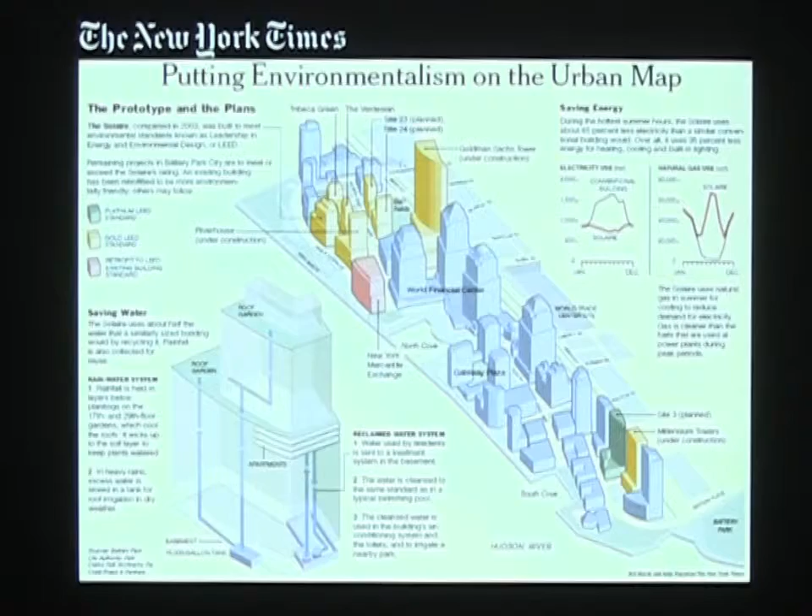And it's really quite a staggering example of educating an industry through government policy. And it included a lot of different requirements. They asked us to submit for what was called the LEED Building Rating Program. At that time, it was a very new thing. Now it has really become the predominant third-party objective measure of the environmental quality of your building. There are a lot of critiques of it, and I think some of them are valid, but it has still become the predominant one.

We had a tax credit, which is a New York State initiative, which we were trying to follow for all sorts of economic incentive benefits. And we had Battery Park City's own requirements. Now, all of these things cut across a lot of different sectors, from energy to air to materials, operations and maintenance, how you build the building, water conservation. It really included a lot of categories. But there were a lot of different issues we were trying to deal with in the 3 buildings.

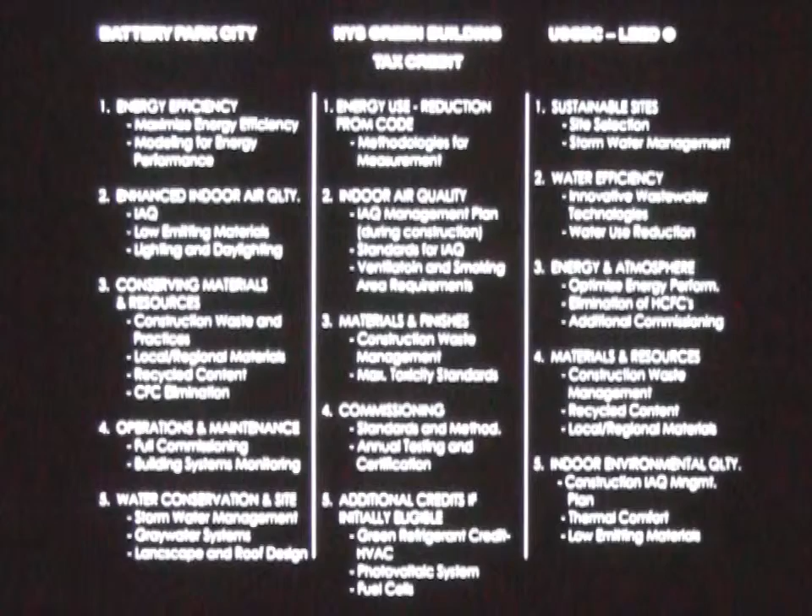That building was very successful, as I said. It led us to do a second building, which was even better. That second building was then the first LEED Platinum building in New York City, and the first residential building to be a platinum building in the country. And it's then led to this third building. So I'm really going to show you more detail about the third building, because this is the one where we kind of put it all together and we were able to do some more fun things.

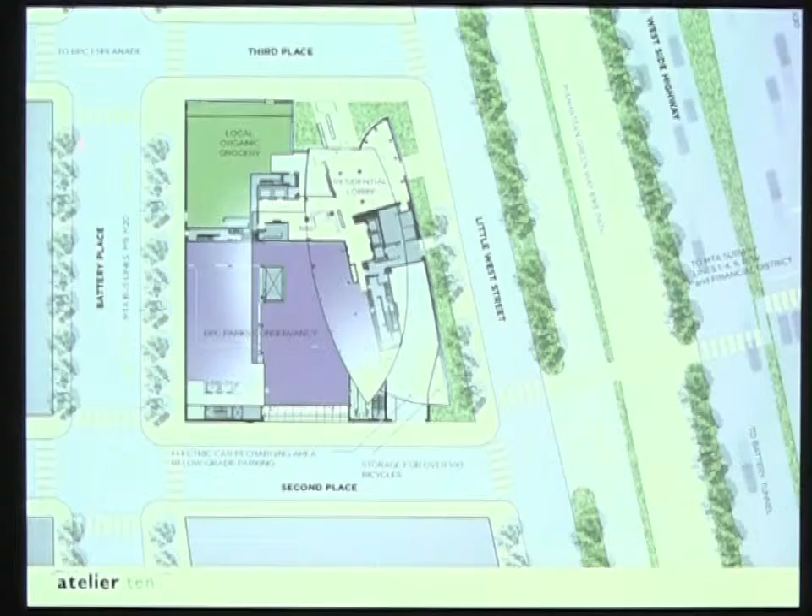So here's the building here. Very glassy in its appearance from the outside, though it's not as glassy as it appears, in that a lot of this glass actually covers the insulated wall behind it. It is on West Street in Manhattan. It's got a lobby at the corner of Little West Street and 3rd Place. For those of you who know Battery Park City, it actually houses the Battery Park City Conservancy, which maintains all of the parks in Battery Park City. So they've got big manure piles and dump trucks who come in and out of their garage. And it's got a little organic grocery as part of their one retail tenant for the ground floor.

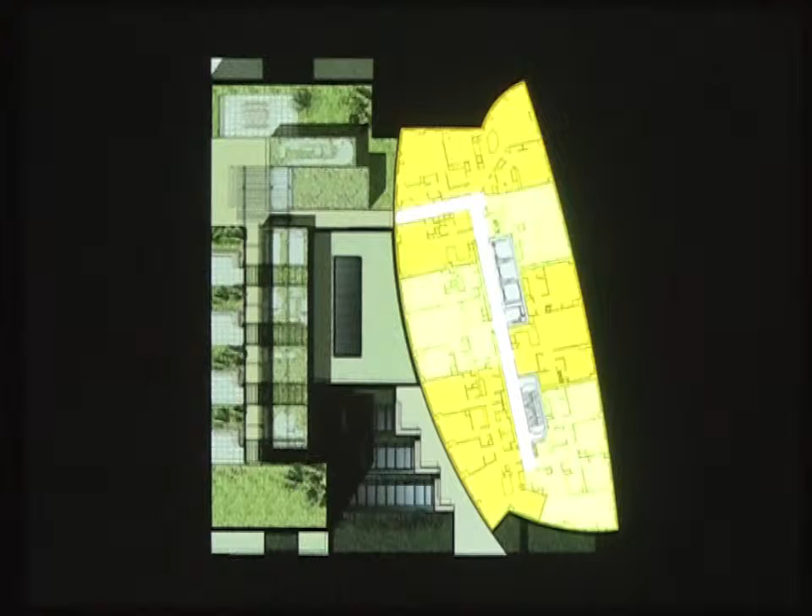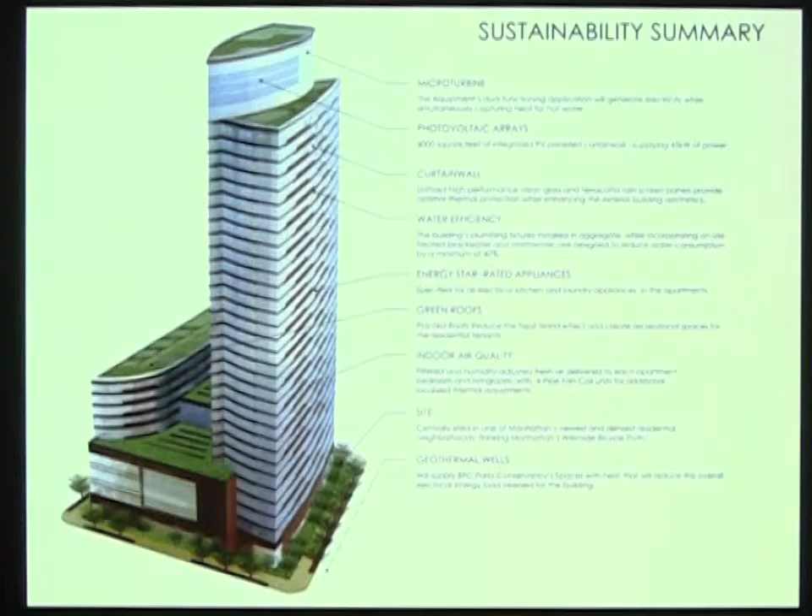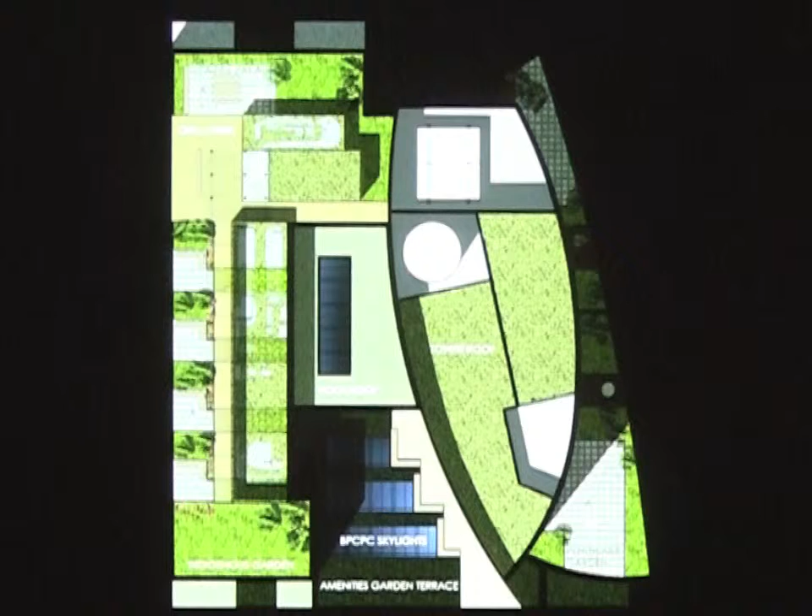And here are all of the green roofs. This is looking down on the building from the very top, showing how every level, every horizontal surface in this building is treated as an amenity and largely planted. Now, what I wanted to show you now was some of the strategies for dealing with environmental issues and resource efficiency.

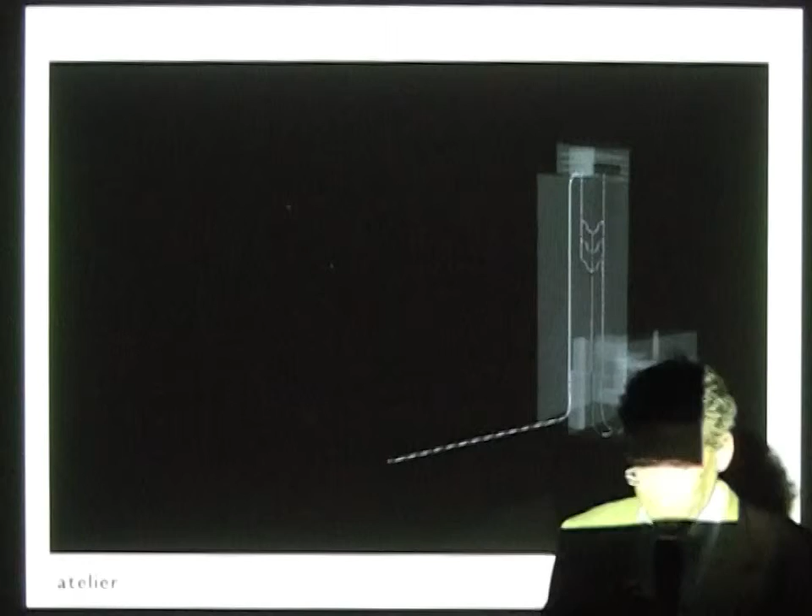You're going to have to bear with me a little bit, because I have some animations in this PowerPoint. And due to the marvels of modern technology, they're not working properly. But if you bear with me, I can actually run them manually. But you're going to have to just bear with me for a second.

So this is describing the water systems in this. We have a gray water treatment plant. All the fresh water comes into the building to a house tank, used for showers, laundry, flushing toilets, and then it goes to a water treatment plant. We treat all of the wastewater in the building. It treats over 30,000 gallons of water a day.

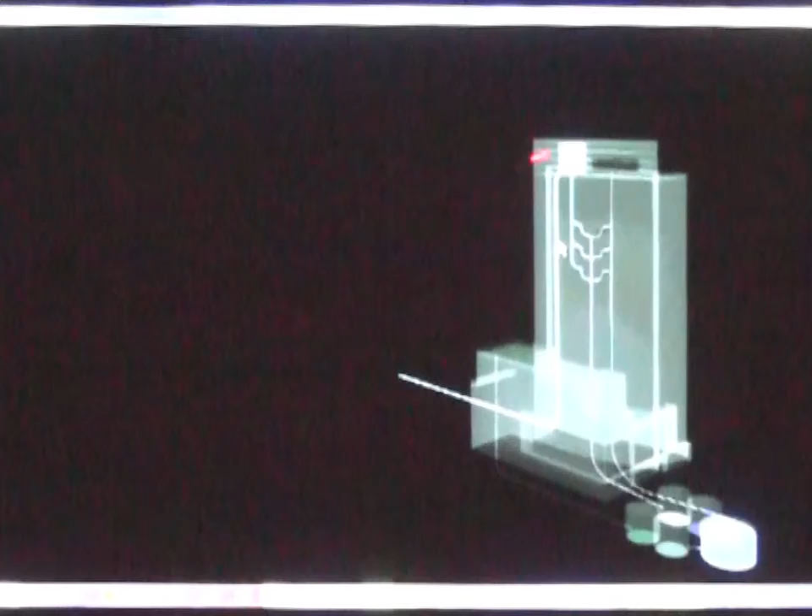That is then mixed with all the storm water, which is also collected. That mixed batch of water, after being treated, is then sent back into the building, and it goes back to the toilets, really only the toilets. It's not used in something that's going to be in direct contact with the skin. It's not used for sinks, and it's not used for showers. And the toilet use is only 5,000 gallons of water a day.

So where does all that water get used? And that's one of the most fascinating things that I learned about water usage. Let me just now put this away and go back to the slideshow.

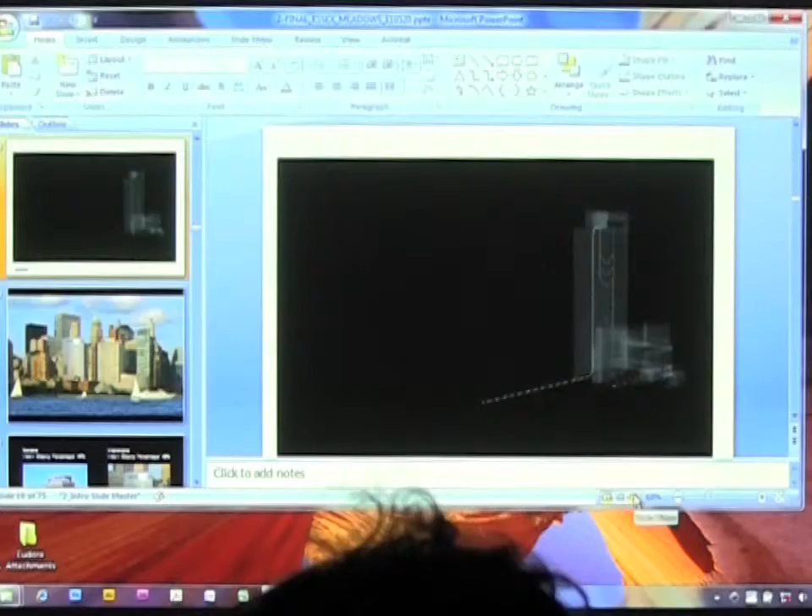So the fascinating thing about the water usage is, as I started analyzing with the engineers, well, what does this water do? Well, some is used for irrigating the planting. Well, what about the rest of it? Well, the cooling tower. The cooling tower is this thing at the top of the building which evaporates water as a way to get you a chilling system to help you create air conditioning. And it evaporates somewhere between 15 and 20,000 gallons of water a day.

And so what I learned in this conversation with engineers, which I never knew, one of those humbling moments, is the biggest use of water in New York City is for cooling towers. The single biggest use of water in most cities is for evaporation in order to run air conditioning. And if you think about the environment and water as a resource, it's a profound thought, because over 50% of the world's population lives in cities now.

I'm doing work in Sao Paulo and Mumbai, cities of 20 million. And all of these people are going towards more urban solutions. And most of them are actually in more temperate climates, or even hotter, subtropical climates than we are. And they're actually demanding, as part of an increased standard of living, more air conditioning.

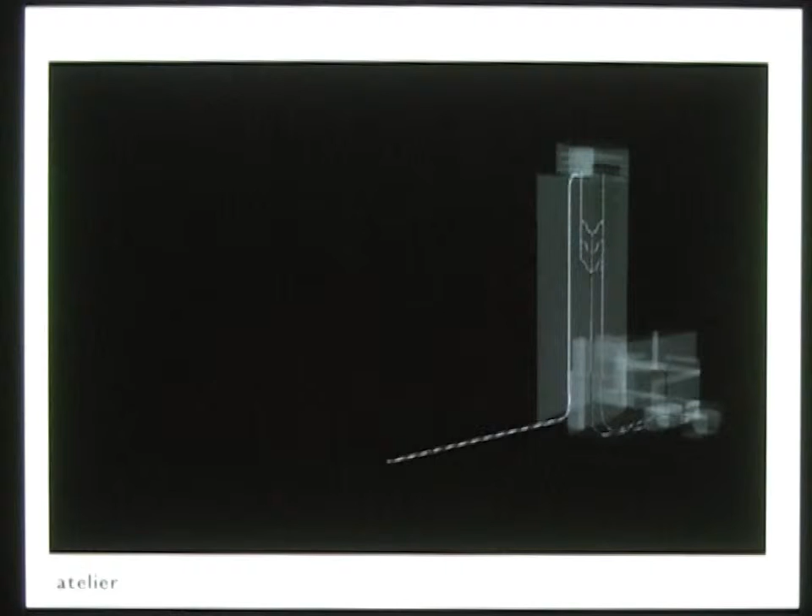And so you think, the water problem we're talking about in this world is intimately related to the issue of air conditioning and urbanization. And so this strategy of reusing water is fundamental to how we're going to deal with water as a problem in the years going forward. But it's something I never knew until we got into having all these conversations.

So here's a view of the building from the river. Now, I talked to you earlier about how glassy this building looks. One of the biggest correlations between an inefficient, high energy use building and the appearance of the building is the amount of glass on the facade. Traditional buildings were pretty effective that way, because you knew that instinctively, intuitively. The older colonial buildings had little windows because you lose a lot of heat through them.

But modern architecture, modern development, modern marketing wants really glassy buildings. And there's some wonderful features to having very glassy windows in living rooms. So we were trying to balance this objective of having some very glassy open areas of the living rooms, and this very abstract composition with a lot of glass, with the energy consequences of doing that. And this was a back and forth with our energy analysts to come at a percentage of glass that we could do.

And the interesting thing is that in the end, these two buildings, while they look wildly different, turn out to be very, very similar in terms of the amount of actual vision glass. And I say vision glass because a lot of the glass you're looking at here is actually called spandrel glass. It's a back-painted glass which is forward of an insulated wall. Instead of having brick in front of it, it's got glass. So sometimes the appearance belies the actual energy performance.

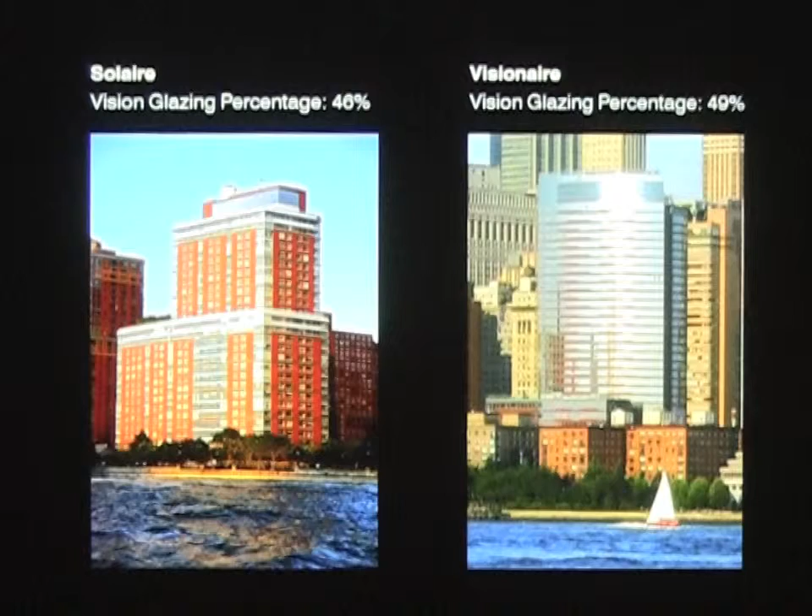But vision glass is one of those indicators of how much energy you're using. Now these are the spandrel areas. These are actually not clear glass. There's insulated wall behind them, and that's the clear glass above, which shows you how well it can be masked if you have a very highly reflective glass.

Now, these are actually as if you took a cut through the wall and you did a digital energy simulation on it. What's interesting about modern technology, one of the things that's happened in the last 10 to 15 years, is the advance in computer modeling software to allow you to really understand the performance of a lot of things that you want to try to design. So what was interesting on our first project, this is the first time anybody had looked at a traditional brick and block New York construction wall using these techniques.

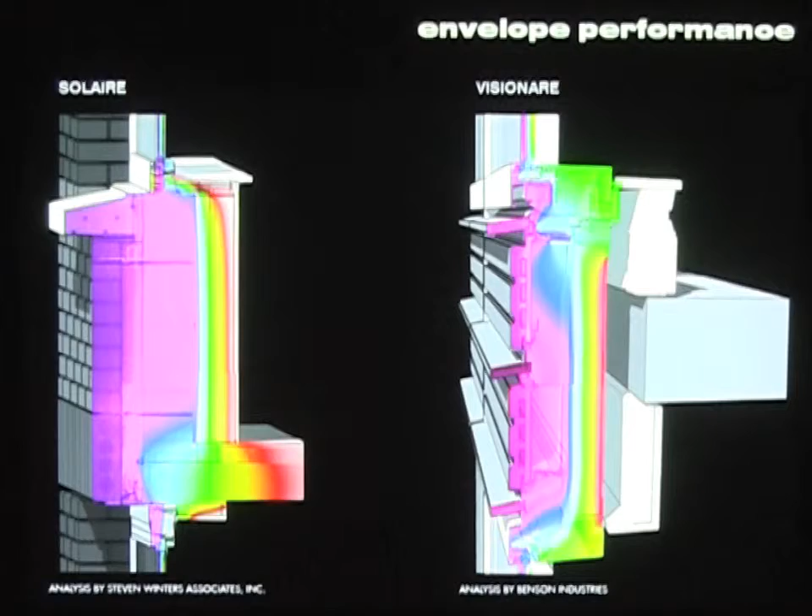And in fact, these things leak like a sieve. And our client, the owner, actually built a mock-up of it and put it in wind tunnel testing to see where it leaked like a sieve, so we could try to patch up a lot of those cracks. But we also did it for the new wall. We worked very carefully on the energy performance of that wall, looking at how we could make a lot of incremental adjustments to make the wall perform better.

We also included a large array of photovoltaics. These are photocells which make electricity. 5% of the building's electricity is generated through the photovoltaic cells at the top of the building, which are integrated into glass panels at the very top of the building. And I think they actually look really beautiful because of this kind of stippling textured effect.

Now, here's another one of those animations you're going to have to bear with me on. But in the end, when we really tried to delve down into the energy use for this building, what was driving the energy use for all of these residential buildings we were doing, we found out that what was really killing us was the ventilation. We were doing all this good stuff with fresh air.

We were bringing outside air in, filtering it, cooling it, dehumidifying it, bringing it to all the apartments, and we had great air quality in all the apartments. But there was a big energy consequence to this because they were running 24 hours a day, even though the buildings were empty a lot of the time.

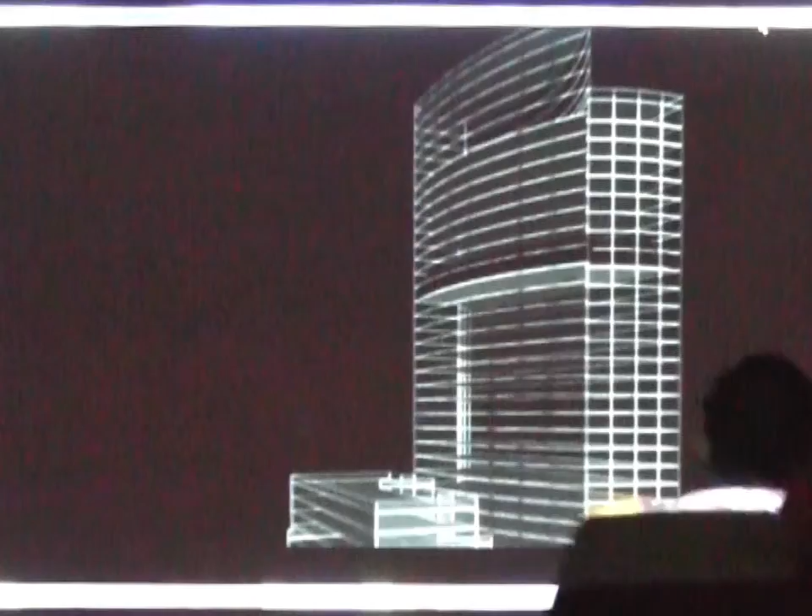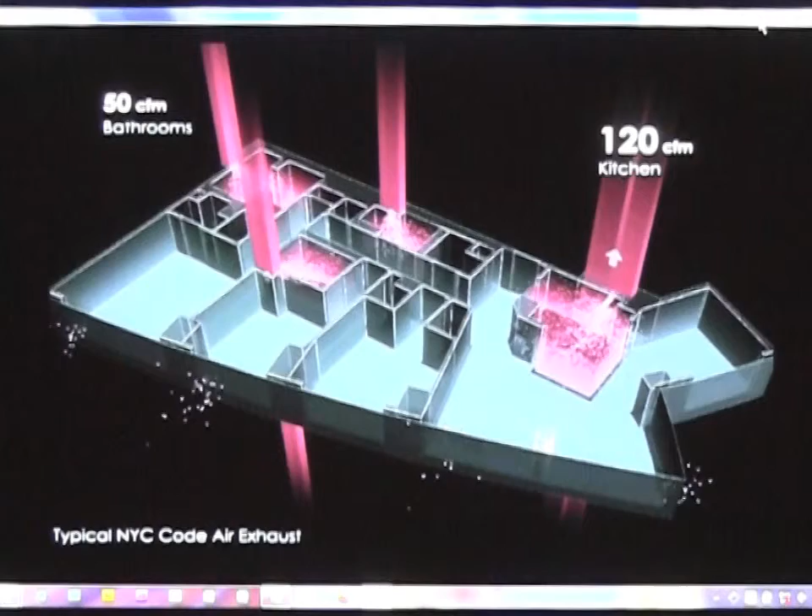So here's a look at a piece of the building. Take a look at the floor of the building, and that's a typical floor of the tower. And if I take a look at one apartment within that building, all that little red fairy dust, that's supposed to be hot air being siphoned out through exhaust. New York City code requires you to exhaust a lot of air out of your kitchens and bathrooms as sanitation measures. But typically you don't supply any air.

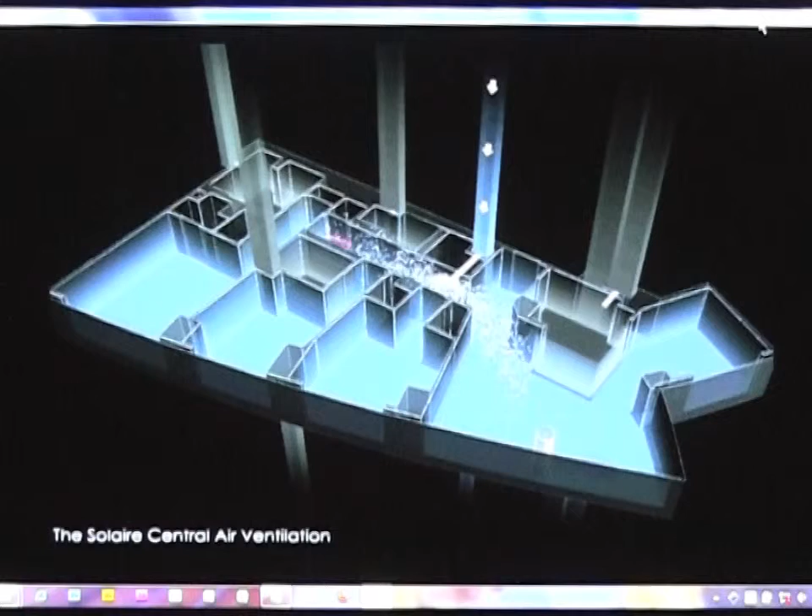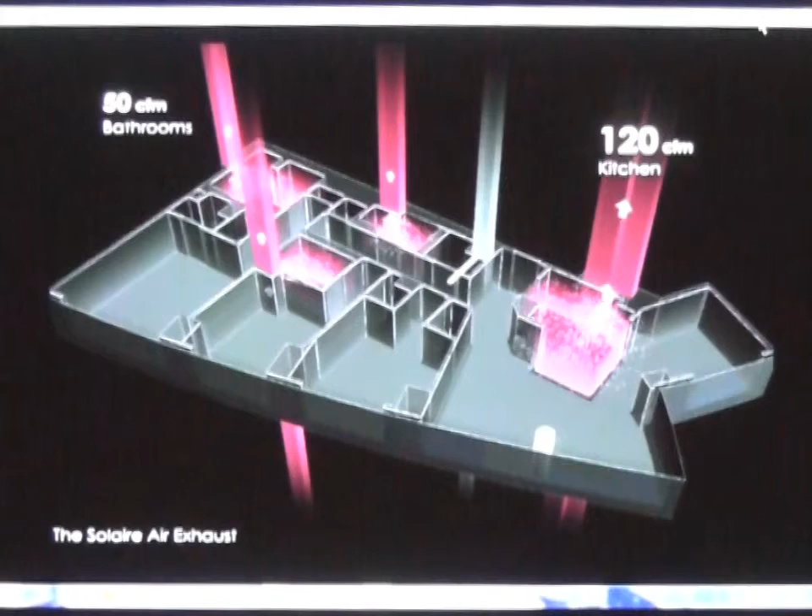Well, now in order to make the building work, we had to supply just as much air as we were exhausting out. That turns out to be an enormous amount of air. And there's a big energy consequence to doing that amount of air 24 hours a day, 7 days a week for apartments which are largely empty.

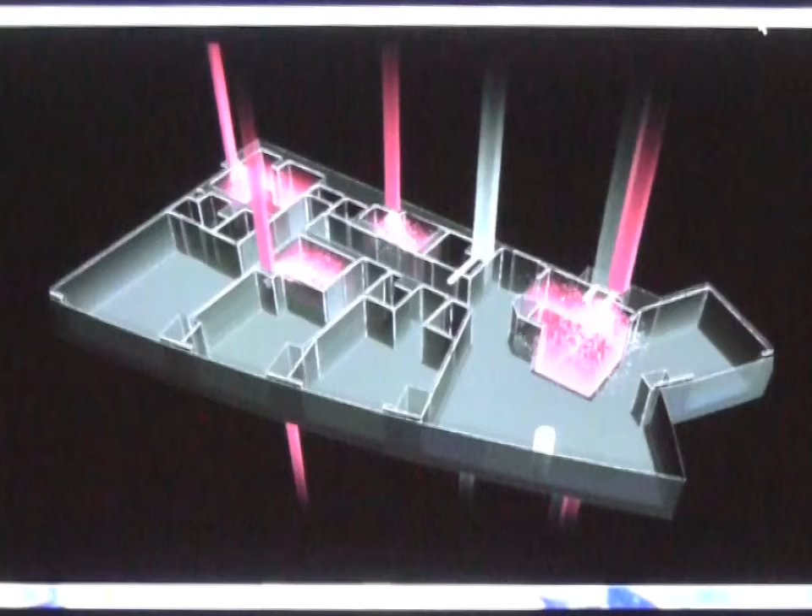So on the second building, we were able to actually work with the New York City Department of Buildings, and we got approval on a pilot basis to downsize the amount of exhaust, and working with newer standards and European and Swedish standards for fresh air supply, try to balance this from a fresh air supply standpoint, saying this is how much fresh air people really need and what is a good standard for fresh air. And let's downsize the amount of exhaust that we've got through the other ones. And this was accepted and it was still thought to be sufficient for good sanitation practice.

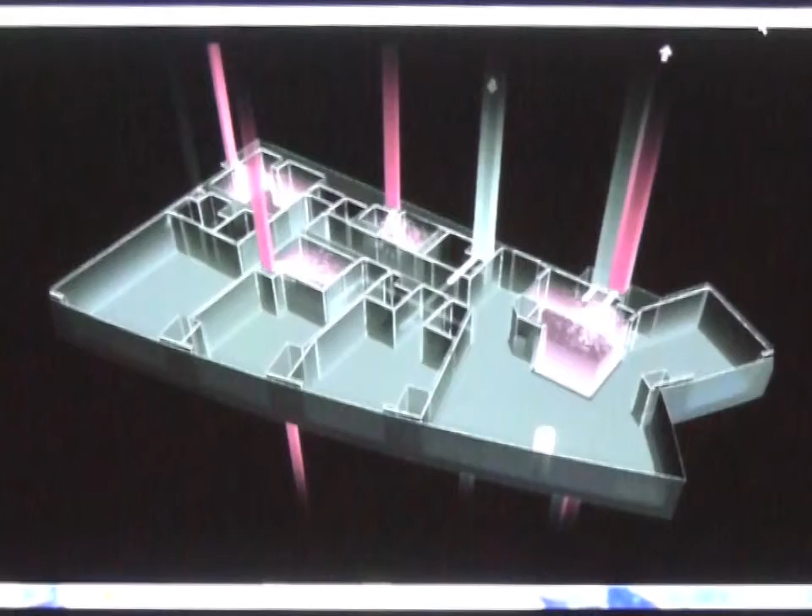Now, it was still running constantly. So what we did finally on the last building was we were able to distribute the air more carefully through the building. We get the air to flow throughout the apartment better.

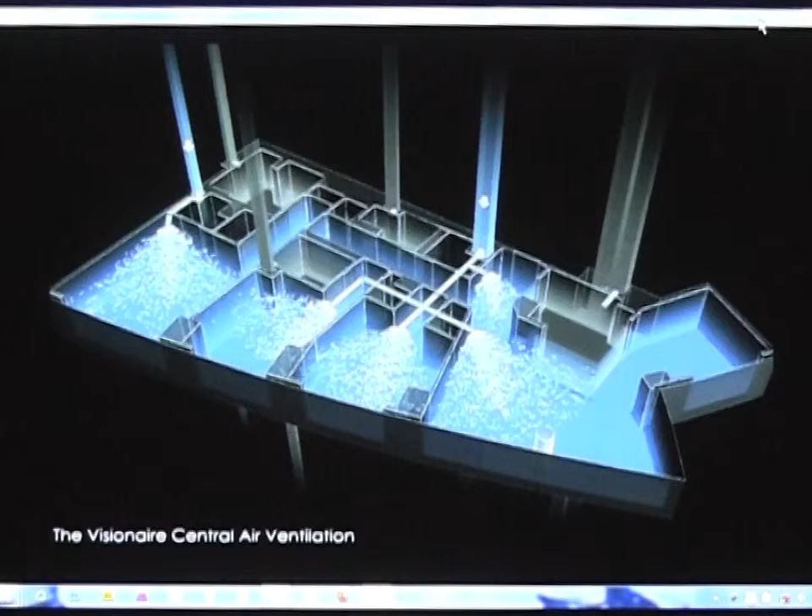And then finally what we were able to do was create a sort of demand-based air ventilation system where you only bring in a minimal amount of air for the minimal amount of exhaust on a typical basis, but you can actually increase that dramatically at the kitchen exhaust when the kitchen's being used, and then you do a higher exhaust.

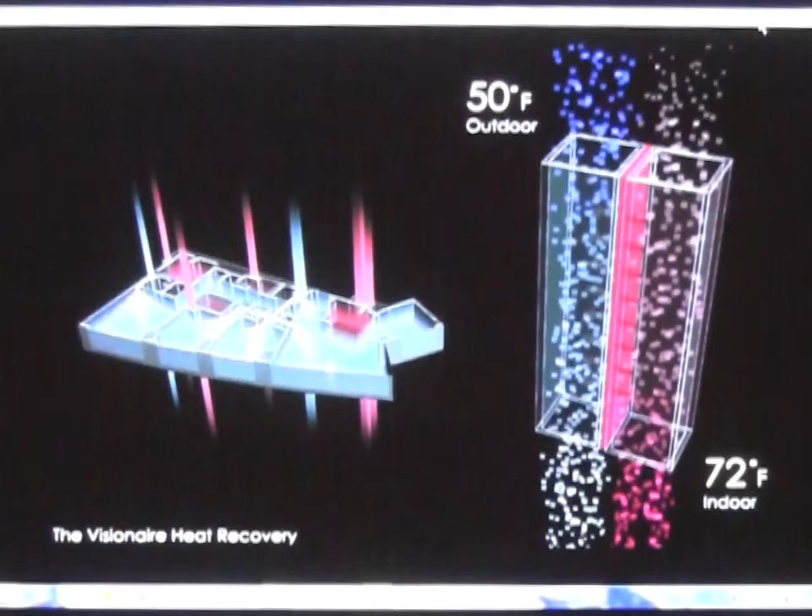And then we further were able to do something at the very top of the exhaust stack, at the very top of the building. We're able to put that on a heat recovery system, so we take all of the heat from all the air that's going out. Now, sometimes that's heat, sometimes it's actually coolth, as they call it. You can take the cooling out of it in the summertime so that you can pre-cool a lot of the air that's coming in. But this turns out to have an enormous impact on the energy use for the building.

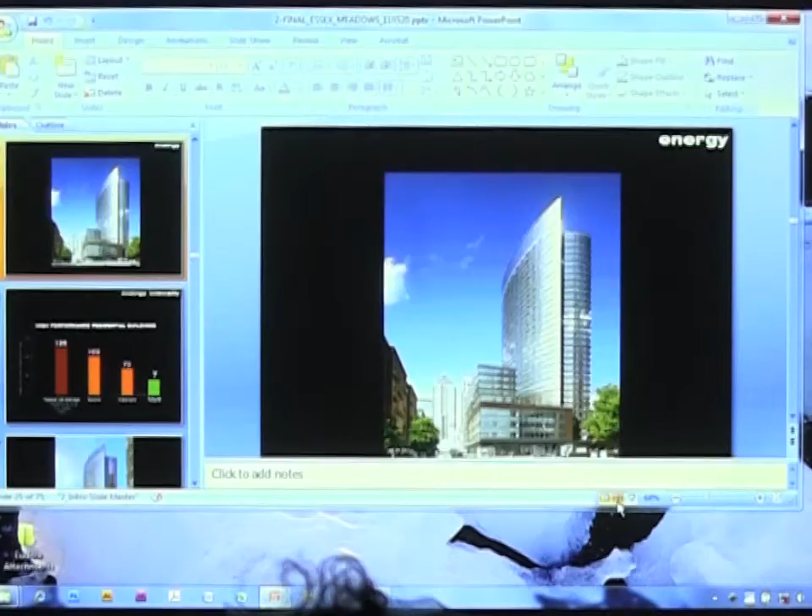And it was the biggest single variable of the discretionary things we had available to impact the overall energy performance. So, as a consequence, the way we're starting to try to look at buildings to understand building energy use better is, rather than looking at it as an overall number, which is very hard to compare one building to the other, it's more using the car model, how many miles per gallon. It's what's called energy intensity. Energy intensity tells you how many BTU per square foot you're using per year.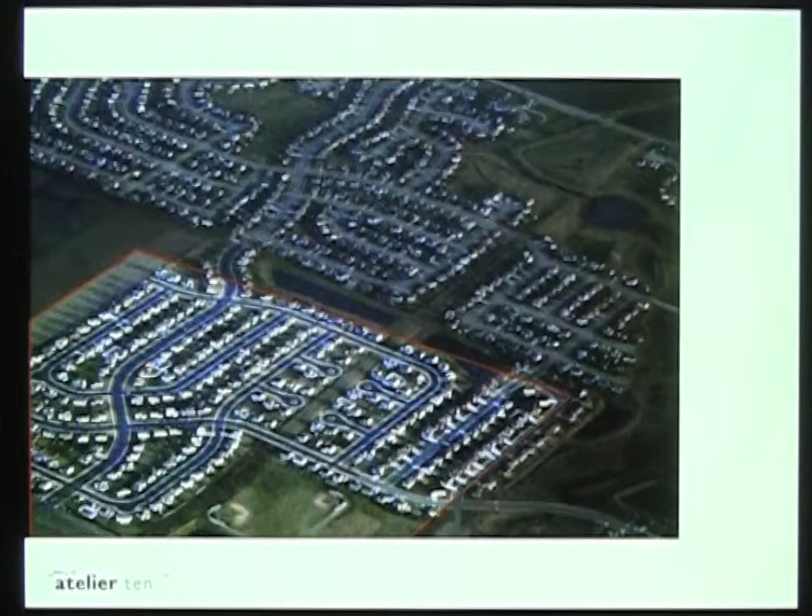Now, the other big environmental question is once you stand back from the building, as a society, if we talk about energy and environmental impact of buildings, anything we're doing on our one building is kind of dwarfed by the difference between 253 apartments here and 250 homes here. It's just land use strategy. It's questions about infrastructure and density. They have, by a factor of 10, a much bigger difference in the environmental use and energy use than what we're doing in an urban building. So it's always trying to keep some perspective on what the real issues are in all of this.

Second building is a classroom building for a business school at the University of Illinois in Urbana-Champaign. It's a beautiful campus, with a nice master plan with a cross-axis of green spaces. And this is our building here, which once it was completed, you can see is shaped around this courtyard.

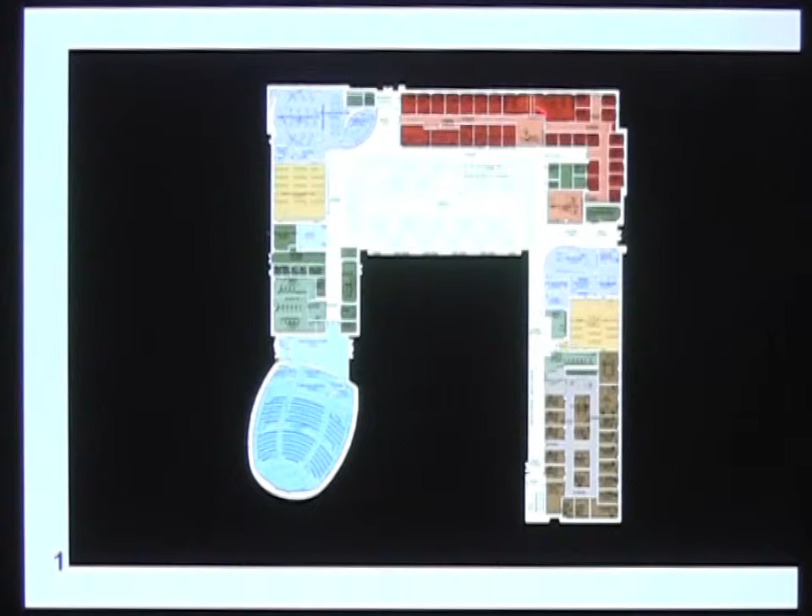And there's a plan of it, with entrances from the two main streets, 22nd Street and I Street, around a central common space, which is really a reading room, workroom, because business schools have a lot of 24-hour study sessions, and they wanted a lot of space spread throughout the building where people could work late into the night. This is set up on a Wi-Fi network so people can work on their laptops in groups. An auditorium off at one wing, and these two wings are offices on the ground floor and classrooms up above.

And this is a view from within the courtyard of that central space. The main bars of the buildings are brick-clad, much more traditional in their language and relating to the traditional buildings on the campus. But they're all around this one very large, very open, very bright and light open space, which has become such a hit on campus that they're having problems trying to limit the amount of people who use it. It gets used for events a lot of the time. People come there from all over the campus to work late at night, but they can't keep people out of it. It's packed all the time. Here's a view of the space.

It's a very beautiful space. It's, again, a wood block floor with acoustic wood panels on the balcony edges, but you can see the amount of daylight that floods in.

Now this roof that goes over it is a 30-foot overhang, so we did a lot of sun angle calculations. It faces due south, so that we can keep the sun out of it during most of the day in the warmer months. In the winter, the sun is lower, and we actually have shades that can come down to deal with glare conditions. But we keep the heat load of the sun out of it during the critical summer months.

And it's a very actively used courtyard as well, with a large central staircase to really promote most of the movement within the space. Here's a view from the outside. Again, the outside is trying to be this sort of more solid exterior, which relates to the traditional Georgian buildings in a more contemporary language, with these beautiful limestone entrance panel walls.

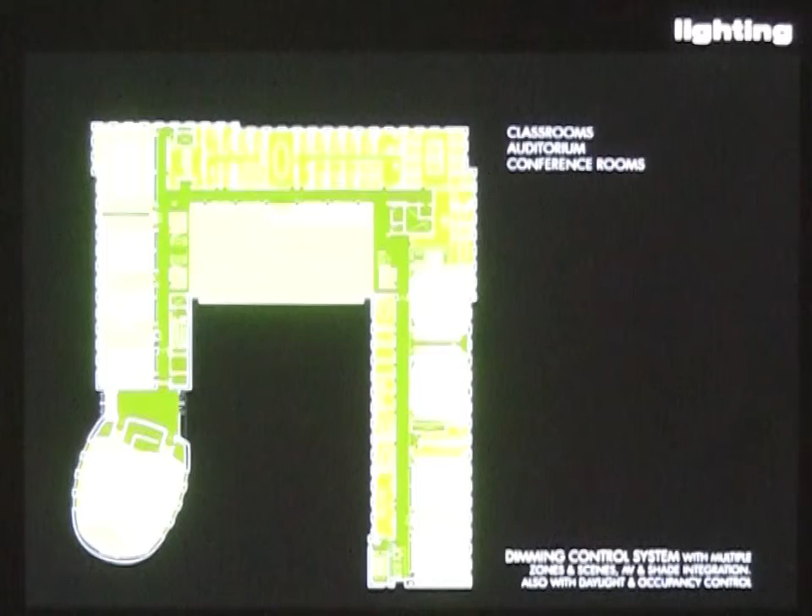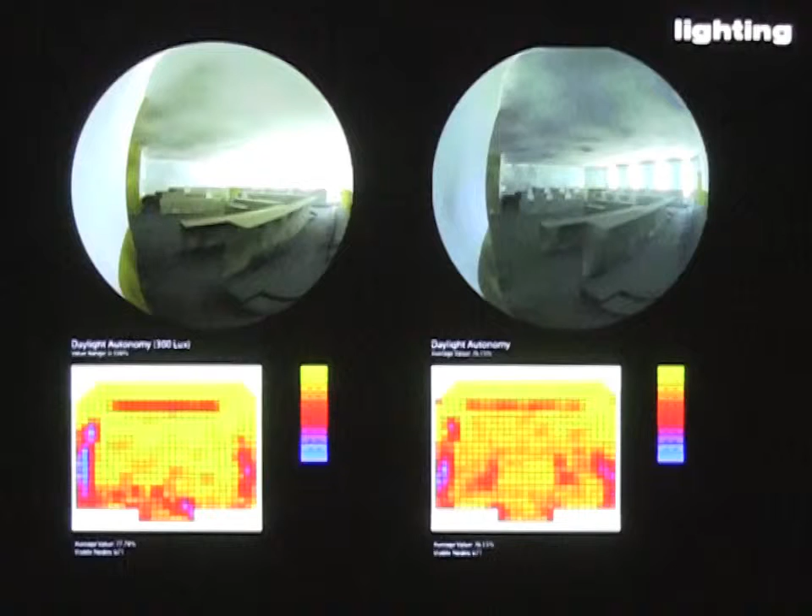Now, we were able to bring a lot of exterior light in because we have these large clerestory windows, and we have a big shelf here on the inside that bounces light deep into the space. This was a result of an analysis we did. This is showing you a plan of the classroom on both sides and a slightly distorted fisheye lens view, talking about what's called daylight autonomy, how much daylight is falling on every single piece of this classroom. So a big part of this analysis was how much daylight are we getting into the room, how evenly are we distributing it, and how can that then be factored back into the lighting systems, so that they're using a lot less energy.

And it was really quite remarkable the degree to which that reduced the amount of overall energy in the building. We also did a lot of things with the exterior wall. We had a triple glazed glass system. Instead of normal insulated glass, where we have 2 panes of glass, it's actually got 3 panes of glass, very efficient. And we put extra insulation on the exterior wall.

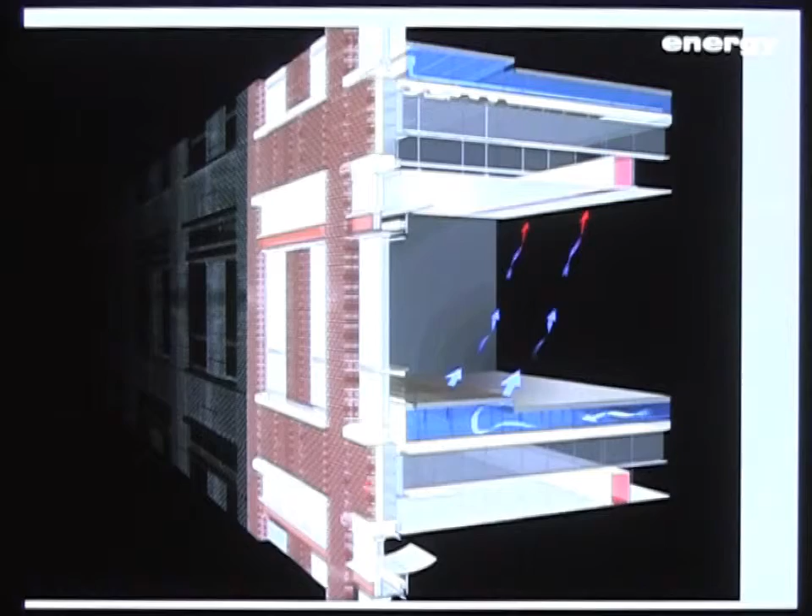Now, when this project was all said and done, I was kind of curious about the relative benefits of a lot of the different things we did. Now, we did a whole photovoltaic array here, the solar cells that I mentioned to you earlier in another project. And they're one of the most visible demonstrations of kind of an environmental energy strategy on the project. But I've always been wondering about what the relative energy benefit is. So I went to our energy analysts, and we sat down, actually even with a cost estimator, and tried to go back and assess the value of the work we did.

This system here cost, we figured, about $750,000. We figured that putting an extra 2 inches of insulation on the exterior wall, which is invisible, cost probably on the order of $900,000 over the course of the project. So they're not that different, $750,000 to $900,000. But when we did an energy analysis of the relative benefits, the amount of energy we saved by doing a better insulated wall with triple glazed windows and making it super energy efficient, as opposed to this photovoltaic array, is a factor of 4.

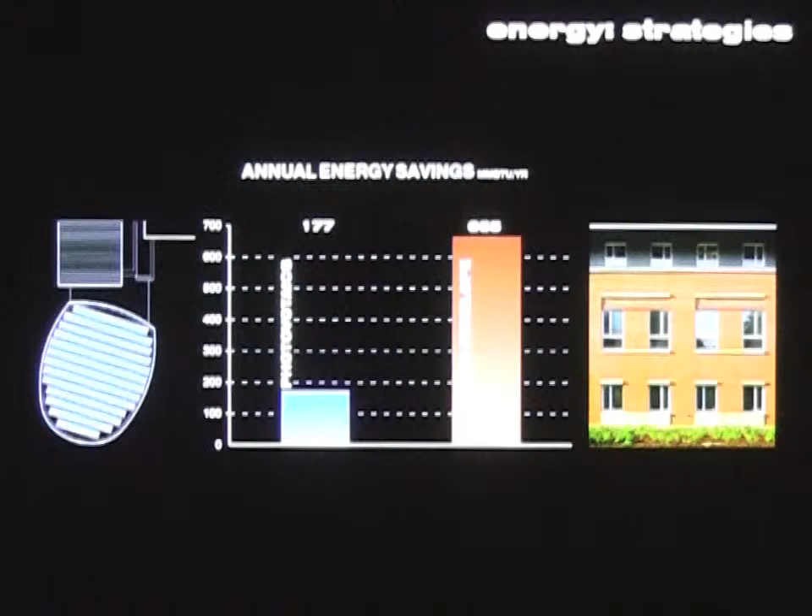It's a dramatic difference. So these visible technologies, which are kind of the poster child of the environmental design movement, are oftentimes actually nice visual symbols, but not nearly as effective as some of the lower key stuff and some of the invisible stuff you might do. And it's necessary to take a step back and look with more rigor at how we really approach the problem from the beginning, before we get onto these additional technologies at the very end.

Now, I also went back as I was sitting around with some of the people we worked on the project with, and I said, I'm just interested. So many of the parameters are so set for us because there's standard codes for all of the things that set the energy use in the building, so I asked the question just hypothetically for our building, and I had the energy analyst do some numbers for us.

We talk about buildings. Buildings use 3/4 of the electricity in this country. The building sector uses something like 73% of the electricity in this country. It uses only about 35% of the energy in this country, because a lot of the energy we use comes through oil and through cars. So if you separate electricity from energy, it's a different number, but it uses a lot of the electricity in the country.

But I was wondering, our codes set the standard ranges of comfort, what people can live in, at a very narrow range. They're at 72 to 75 degrees. If it gets over 75 degrees, it cools you. If you go below 72 degrees, the building needs to warm up. And the human being is actually a pretty adaptable species, and somehow managed to survive all of its time on this planet living far outside of a range of 72 to 75 degrees. And so if you simply set the definition of comfort to be 71 degrees to 76 degrees, you would save 123 million BTUs per year.

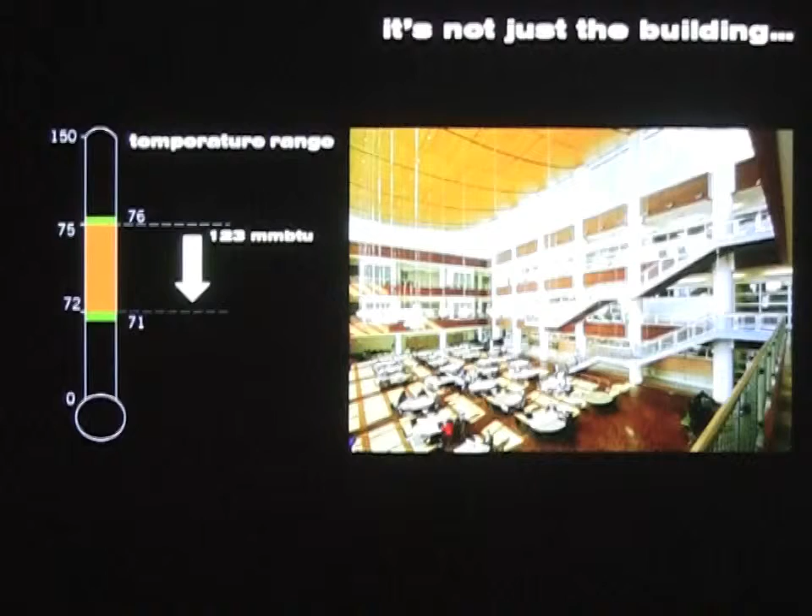This is the last photograph of the University of Illinois Commons with the staircase. But it actually goes also to the equipment we use, because a lot of the energy use in the building is also set through this little number called plug load, which you never hear about. But it's what sets how many watts per square foot you have in a building. And it's all based on how much our computer equipment needs. And so making more energy efficient computers will in the end have this incredibly leveraged, multiplying effect throughout the building. So it's the people, it's the equipment, it's a lot of the stuff in the building that is setting the criteria for the use of energy within the building finally.

So my final project is an office building in Mumbai, India. And it really was my first time in India, my first time in Mumbai, and it's been an incredible learning process, which I'm still only at the beginning of, even though the project is now under construction. The client did want a LEED Platinum building, which was a nice goal to have from the outset, so it set us with our design team at kind of a high level of aspiration.

Downtown Mumbai, traditional Mumbai, was actually a series of fishing islands, which then got interconnected by first the Portuguese and then the English to be made into the city, and then connected to this peninsula. The old sort of downtown colonial Mumbai is down here. Mumbai has grown exponentially. It was in the late 40s a city of 7 million. Now it's a city of 20 million people.

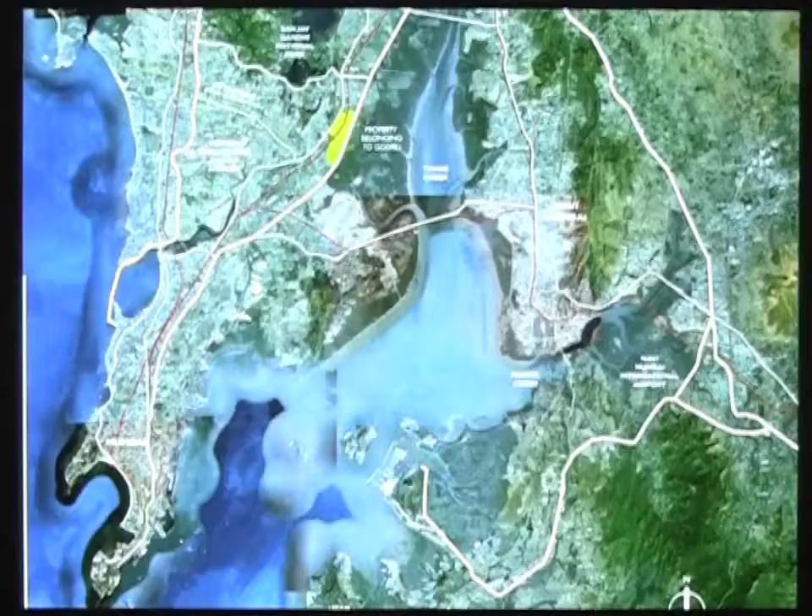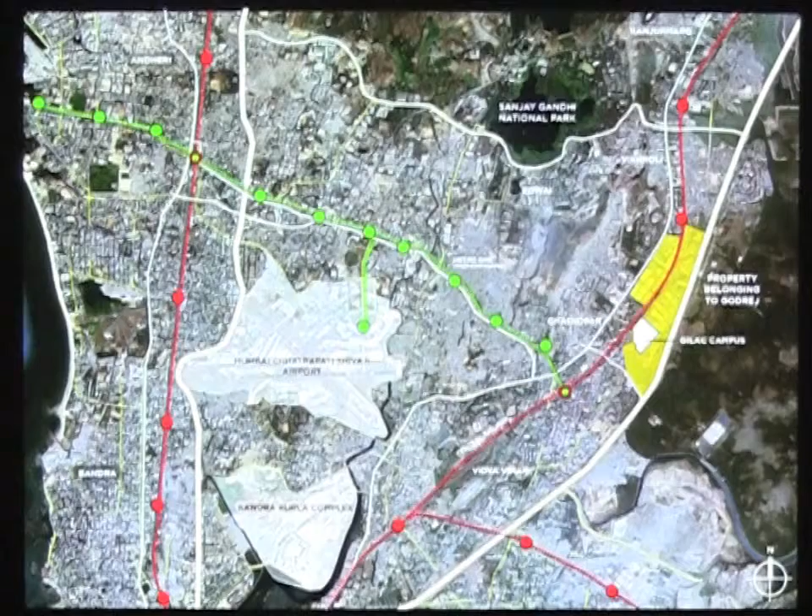And on a couple of major transportation nodes of roads and of the rail lines going out of Mumbai, which we're desperately trying to hook into so that we have a public transportation infrastructure for this. And here's the main international airport. They own a lot of land. They own over 400 acres. They have asked us to look at a first piece of 40 acres to transform it from industrial use to a more contemporary commercial use.

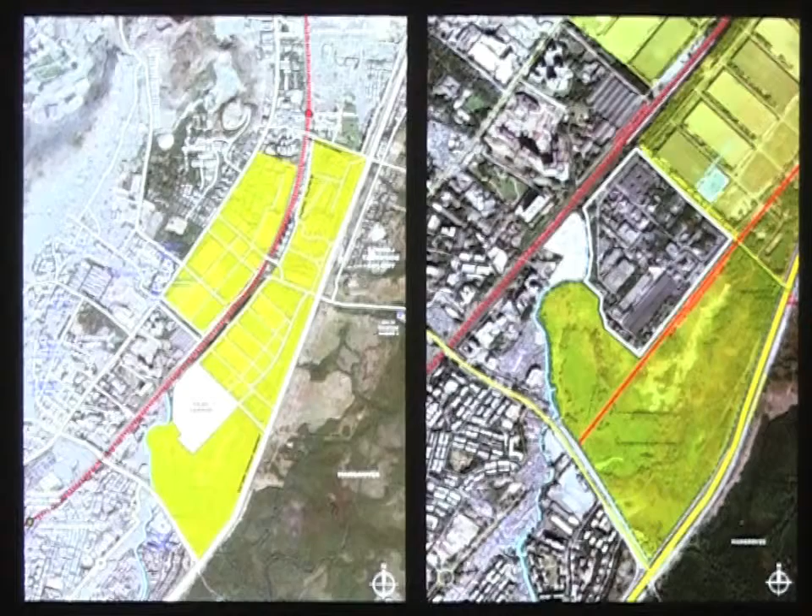And this is the aerial photograph of the site we're actually working on now. You can see it's actually a very pleasant place. They have really maintained a good stock of trees. It's actually at the edge of what used to be these great mangrove groves, because it's right at the edge of the bay as it comes in, these saltwater mangrove groves. And they've maintained a lot of the trees. They've actually even started a nursery and have done an active tree planting program around it. We can see how lush these trees all are and how shady that environment is, and that's one of the things that we're trying to play with and work off of in this master plan.

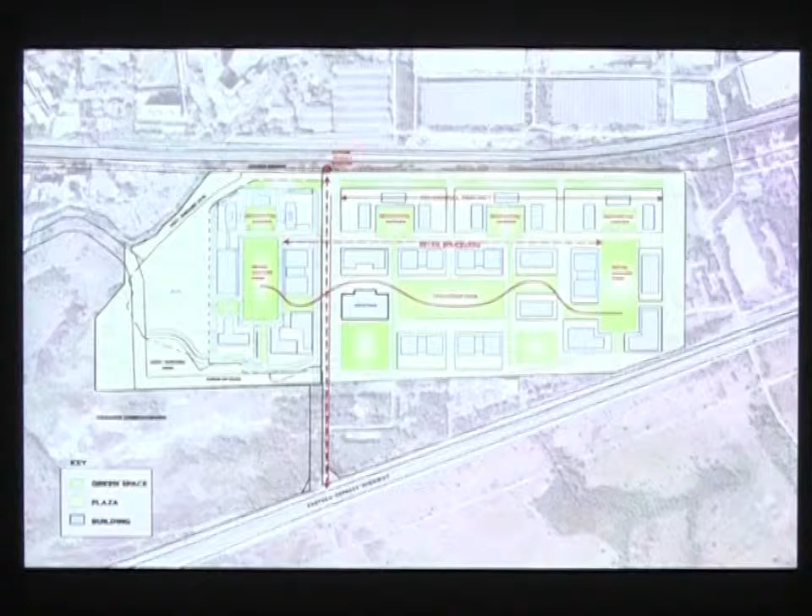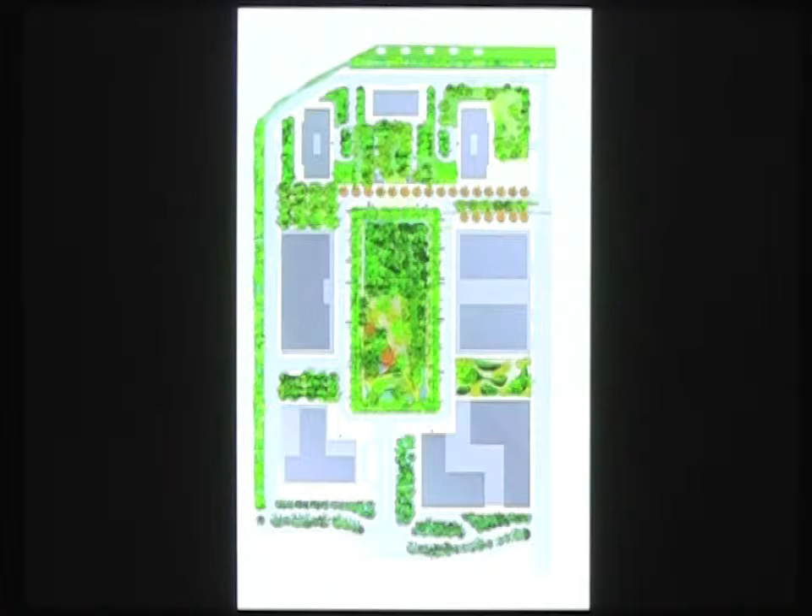So we first took an overall look at the overall master, 400 acres, trying to think of how we distribute a series of more open green spaces within it, distribute a series of different uses, create some shuttles and interconnections back to the rail lines, because there's a rail station up at the very end of their land. And we've come up with a master plan for this first 40 acres with a total of 7 buildings, trying to preserve as much planted green park space as possible, with a lot of the deep shading that it allows, which is so welcome and so necessary in India.

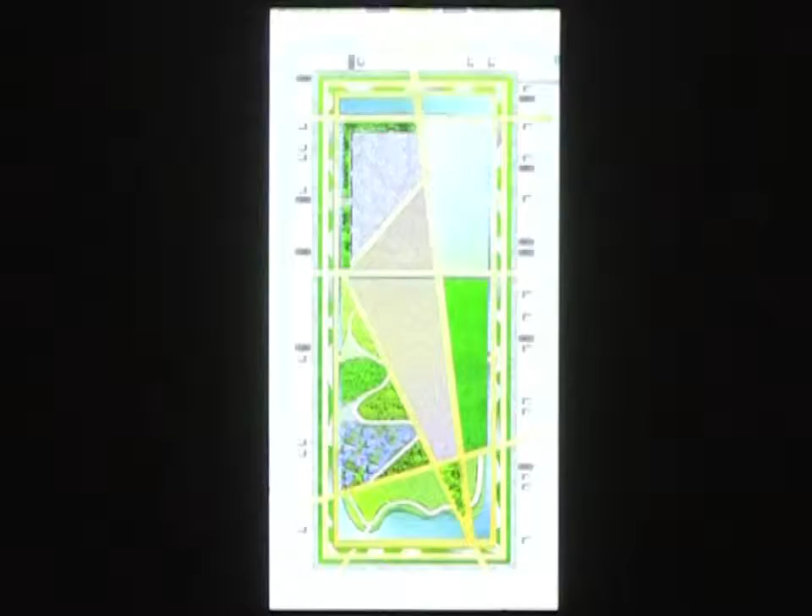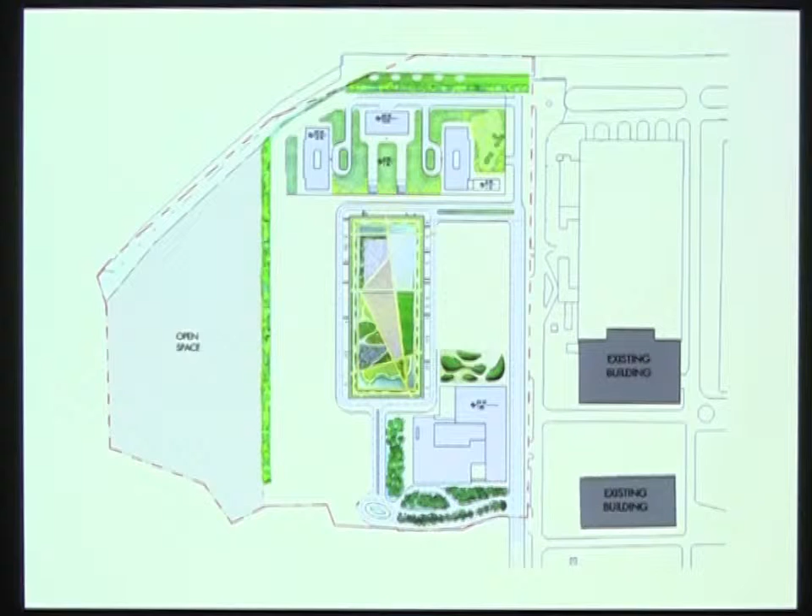And it's a phasing plan, which would show you the building we're working on now, the first building, which is a headquarters for the Godrej companies. And then that will be followed by the Central Park, which will be followed by 3 residential buildings, because they want this to be a lively environment around the day and around the week, so it's not purely a commercial environment. There's going to be a hotel here, and then there'll be 2 more office buildings finally.

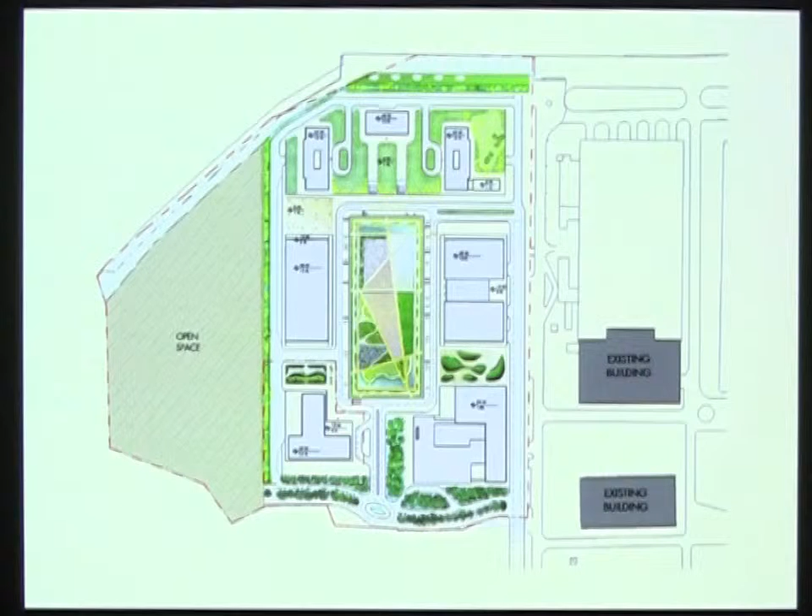So this is kind of the build-out plan for it. Trying to figure out a mass transportation infrastructure network. India is rapidly going to cars, as much as the developing world is, but in a city of 20 million, they'll never be able to build enough roads to put those cars on. And it's already choked with cars. So the notion that they would put everyone in cars is sort of doomed to failure, just as we've seen in many of our cities.

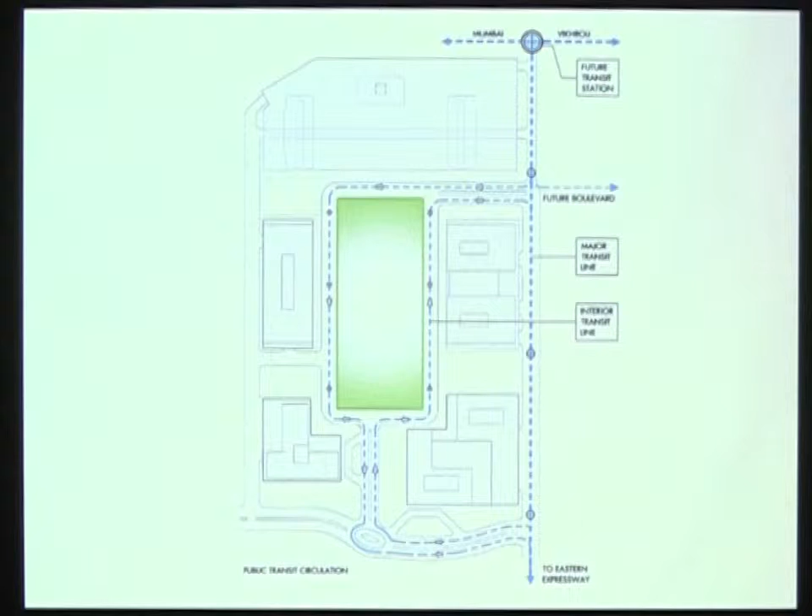And so we're trying to create an infrastructure which allows them to base it on mass transportation, at least while they still have the parking that they want for their cars. But I think the longer-term goal is India is putting billions now into the infrastructure of mass transportation to try to expand it, to deal with their densities and their urbanization.

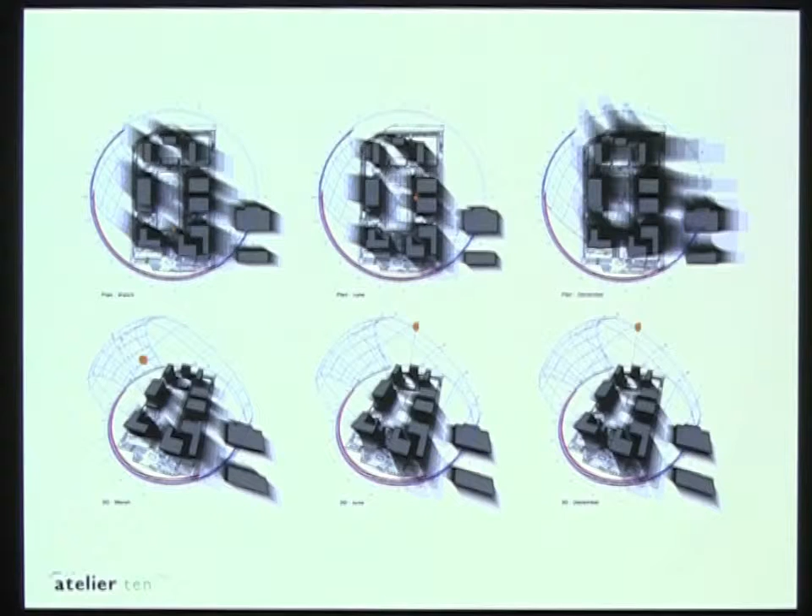We did a lot of solar studies. These are actually studies done by our environmental engineers, Atelier Ten, looking at sun angle studies for the overall buildings, where the shading is. And for our first building in particular, it was a very big footprint, which we carved up into 2 main portions with a big central atrium, and did studies showing how we could get as much daylight as possible.

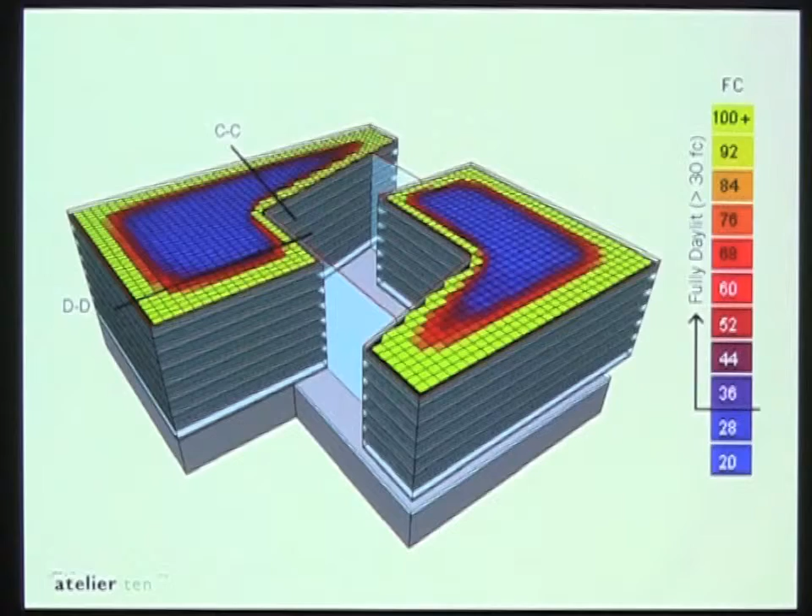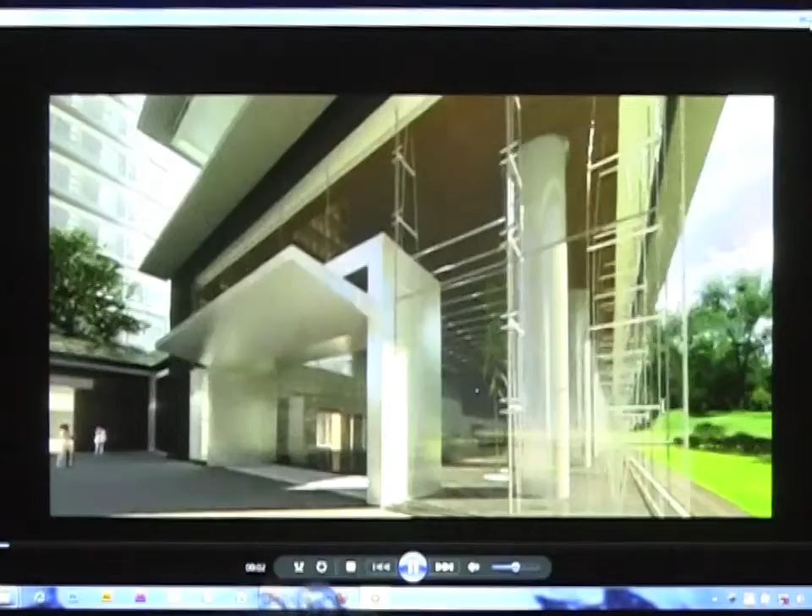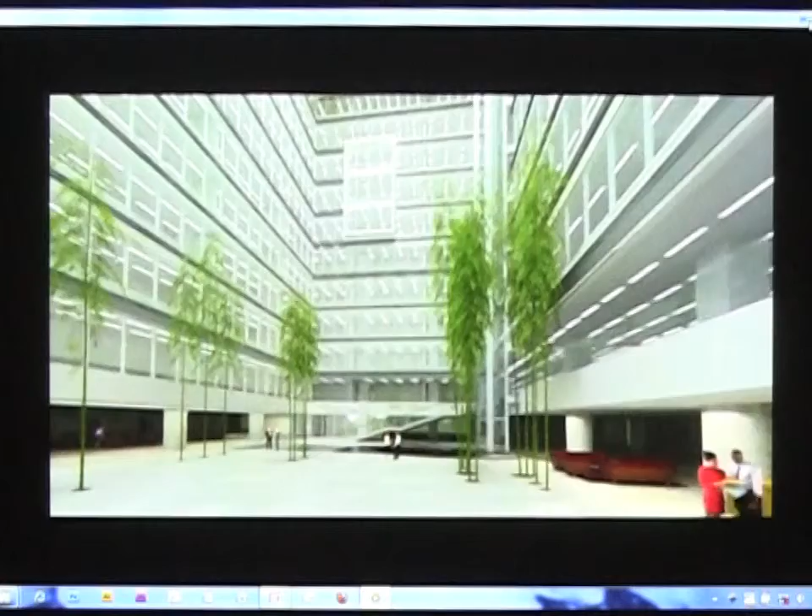So this is actually entering into the lobby from the park side with bamboo against one edge, and then there are these stairs and escalators up into the large central atrium space. The side you see to your left, that large atrium window which looks onto the heavily landscaped central space, is facing north. So we were able to have that be kind of the picture window, which looks out into the landscape because it's facing north, so we're able to control the sunlight into that space.

Now, the fascinating thing about Mumbai, several fascinating things, but from an environmental standpoint, resource standpoint, is the great extremes of water. And this is the monthly rainfall in Mumbai. Now, you probably know about the monsoons. So I had some idea that they get a lot of water for a certain time of year. So during the summer, they get a lot of water. They get over 25 inches in July, per month. For these 3 months in particular, and it drops off precipitously in September.

Now, they get more water than they know what to do with. It's a flooding problem. It's a storm sewage problem. How do you get this water out of there? But what I hadn't realized was the flip side of it is for the next 9 months, they don't get a drop of water. They get nothing. And they don't have a way to store it all.

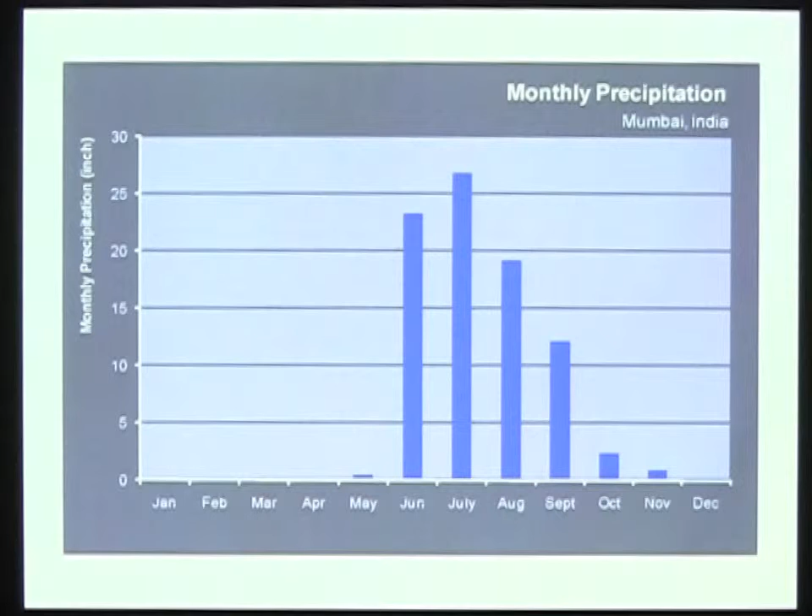They don't have the Adirondacks, which New York City has to store umpteen billion gallons of fresh water. So they store what they can, but they have a severe water shortage problem come March, April, May. To such an extent, they don't let their office buildings use fresh water. You're only allowed to treat your own water. You're on your own for those last few months. So designing a building in terms of water usage is quite a thing. They do allow fresh water usage for residential buildings, but not for office buildings.

So we had, sorry. I guess my time is up.

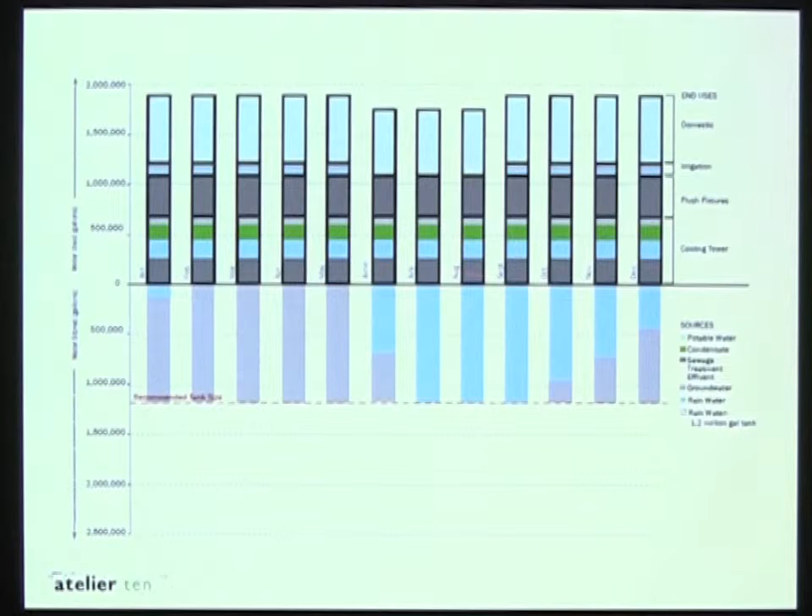So we had to calculate how much water we're going to need in this building. And then we created a series of large water storage features throughout this master plan to try to retain as much water as we could within the site and use it within the building. Now, this shows you how much water we need and the availability of water. During the summer, there's plenty of water available. But we want to store as much of it so that we can keep some of it into the drier months when we're still using a certain amount of water.

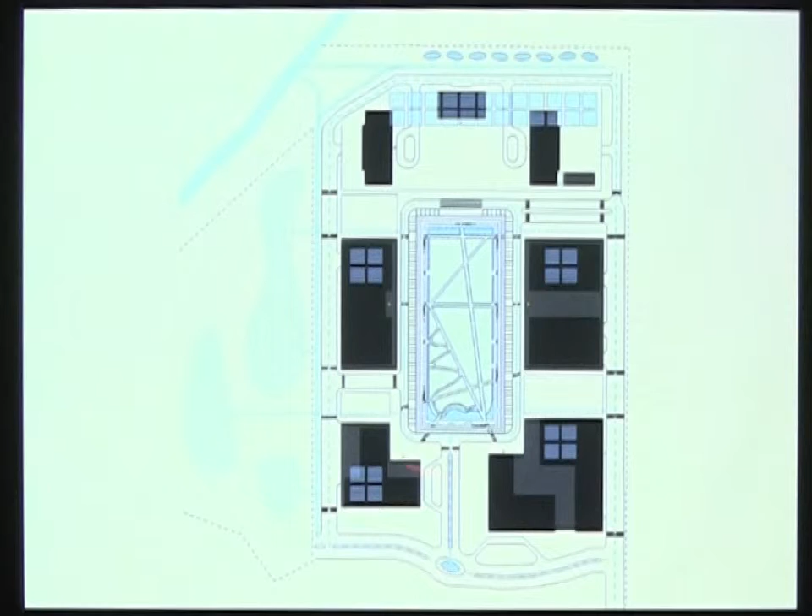And we went through a really extensive analysis of how do we use less water. We limit the cooling towers. We make more efficient fixtures. We actually maybe try to eliminate the cooling towers through different kinds of systems. We use gray water and black water. These are different large water retention tanks throughout the master plan, some of which are incorporated into landscape features, some of which are in the basements of the buildings.

But when we looked at it through energy, there was a whole other impact of water, which is back to air conditioning. When you want to do air conditioning, you run these big chillers, and these chillers are connected to cooling towers. And you run big compressors. Now, those compressors are much more effective if they're working off of cooling towers and evaporating water. The evaporation of water is one of the most efficient ways, actually, to cool.

If you do an air-based cooling system, which is much more like your window air conditioners, it's like a radiator. You're just running fluid inside metal, and it's trying to just radiate to the outside air. It is only about half as efficient. So there's a huge difference in the efficiency of your cooling systems if you can evaporate water or whether you can't, and you've got to do it through air-based. Mumbai is all air-based cooling systems. Very inefficient.

So we've tried to really look at this. Well, let's do a water-based cooling system. Terrific, except for several months of the year, the city's not going to give you any water. So how do you do that? So we're putting in a desalinization plant in our building, because our groundwater is largely recharged from the bay. It's salt water, but that means there's a constant supply of it. But it's brackish, it's salty. You can't use salty water in a cooling tower. But you can desalinate it in order to evaporate it.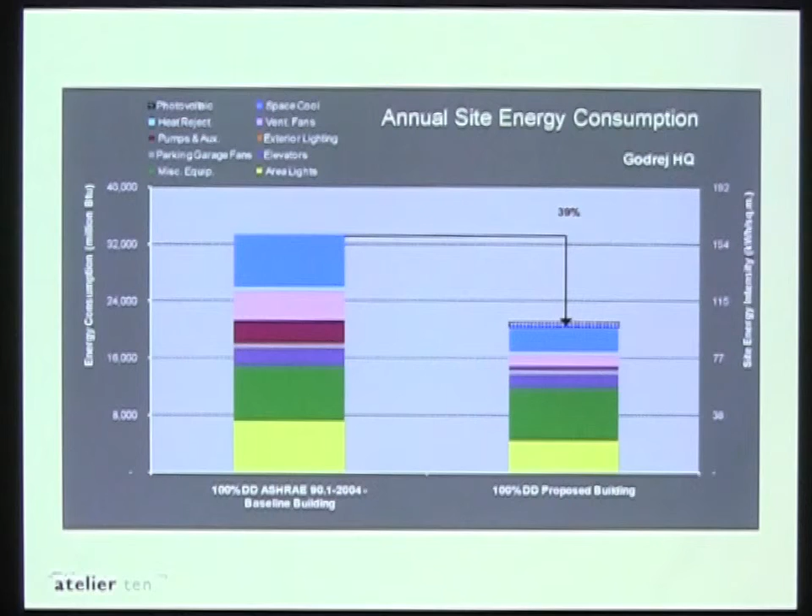Now, you think of desalinization plants in terms of creating fresh water for drinking, but going back to one of those earlier points, the major use of water in cities is for evaporation. So we ended up doing a desalinization plant in our building so we can desalinate the groundwater and run it in a water-based cooling system, and that drove our energy use for cooling way down. And obviously we combined it with a series of other good things. But it was one of the most interesting, complicated exercises on this project to understand what the final result needed to be.